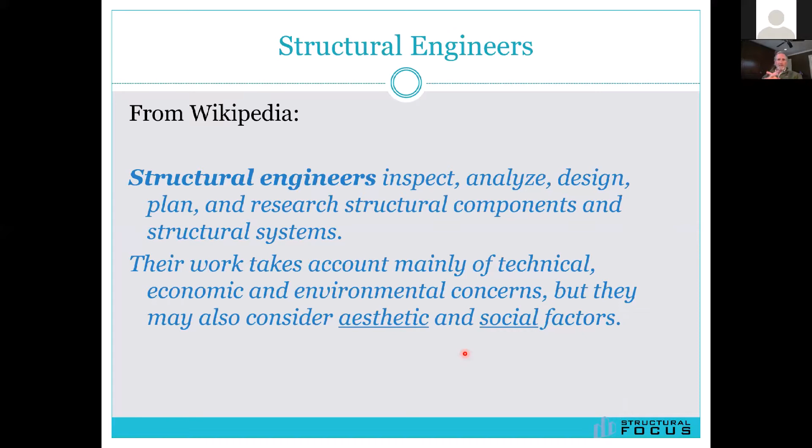Structural engineers, I always like to throw this slide in there because I appreciate that Wikipedia has this second sentence. The first one is what you'd expect: we inspect, analyze, design, plan, and research structural components and structural systems. The second one, though, is interesting - it says we take into account mainly technical, economic, and environmental concerns, but also consider aesthetic and social factors. I think that's really great that that's listed in our description.

Structural Focus, our mission is we exist to do projects that we can be proud of and proud of how we do them. My point is that structural engineering is more than just analyzing and designing a building's connections. There's also other considerations: sustainability, public safety, aesthetics, community resilience, preservation of historic structures, and obviously the client's needs. We're working for clients and have to pay attention to what their needs are. We need to understand not only them, but the impact we have on the natural and built environment.

So five things we do at Structural Focus that we like to emphasize: we like to think like our clients, putting ourselves in their shoes to understand their needs. We explain and use performance objectives whenever possible. We try to reuse buildings - we're not inclined when people call us and say, I need you to look at this building and tell me that I can tear it down. We'd rather save a building than tear it down. We try to communicate clearly, and we like to design elegantly and authentically, as I put it. A lot of that will come out as we talk.

Learning from earthquakes. I grew up in Richmond, and didn't really know what an earthquake was. I moved to California and found out I knew nothing about the main driver of structural engineering there - earthquakes. Luckily, I went to work for Degenkolb, and Henry Degenkolb was kind of the original earthquake chaser. He felt that the real-life scenes after an earthquake were the best classroom for structural engineers to figure out how to design and retrofit for earthquakes.

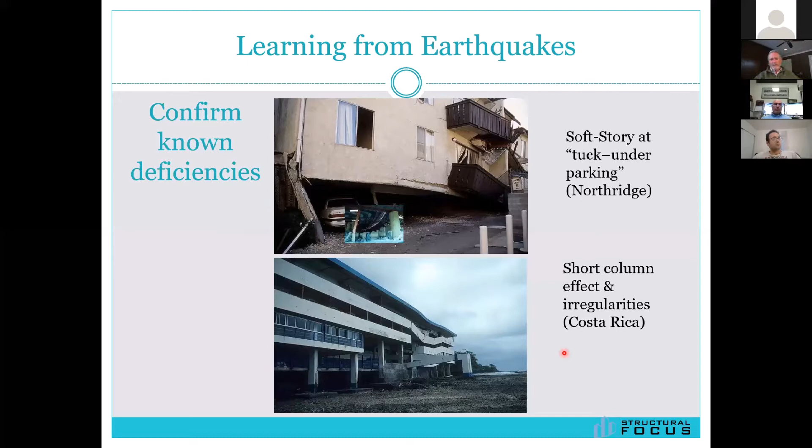So we went out lots of times looking at earthquake damage. Sometimes we're looking for known deficiencies, confirming issues like the soft stories and tuck-under parking in Northridge. This is a resort hotel in Costa Rica that I went to back in '91 or '92, where the short column effect took it down - it basically collapsed the building.

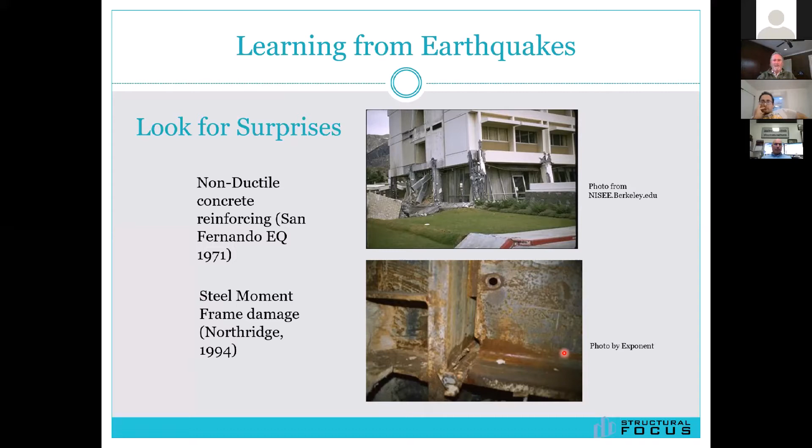We also have surprises that we did not expect in the structural engineering world. There was a brand new hospital in San Fernando that was hit by the 1971 earthquake, and it was destroyed because of the non-ductile detailing in the columns. Then, even going into the Northridge earthquake, we thought steel moment frame systems were the best there is, far superior to any other system out there. When we first started hearing reports of damage, we couldn't believe it. Turns out it was a very significant problem.

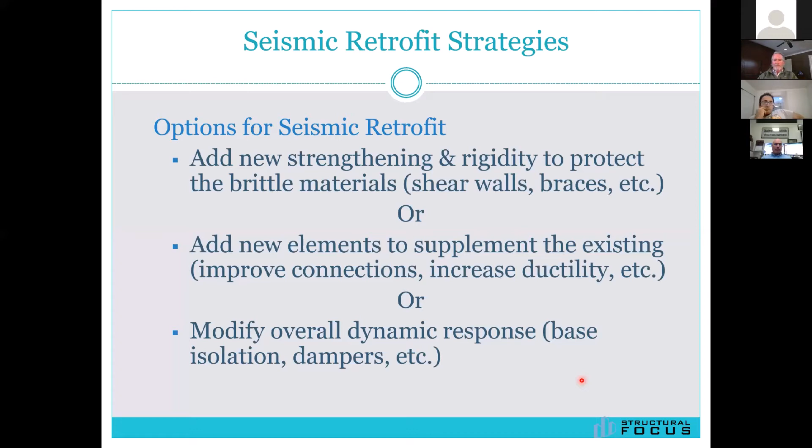So that's where, if it's a very brittle, historic landmark building, that sometimes is the best solution. There have been several city halls - San Francisco City Hall, Oakland City Hall, Los Angeles City Hall, Pasadena City Hall - that have been base isolated because they felt that was the most economical and the best protection for that particular building, but it is expensive to do.

So a little bit more about strategy. If you're an owner and you have a historic landmark building and you want that building, what you have to find out is whether that building is a good investment. You might like the historic architecture, but it needs to be marketable. You need to be able to make money on that building. So they'll ask all the experts, they'll ask the realtor, can we actually, does this building have value? Is it marketable? They'll ask the architect, can this building be usable?

You know, is it functional? Is it got the right space? Has it got enough light, all the things that a tenant or a user might want? They ask the mechanical, electrical, and plumbing consultant, can it be efficient, with all the energy costs and everything nowadays? So they want to know whether they actually can make this have efficient systems.

But in California, what's interesting is many times they'll come to us and ask, can it be safe? And they have an end goal, and we often are the deal breaker, because the seismic retrofit cost is often the most expensive part of the project. Nobody wants to mess around with life safety. It's always, if you talk about it being unsafe, then everybody runs away. So it's an interesting place for us.

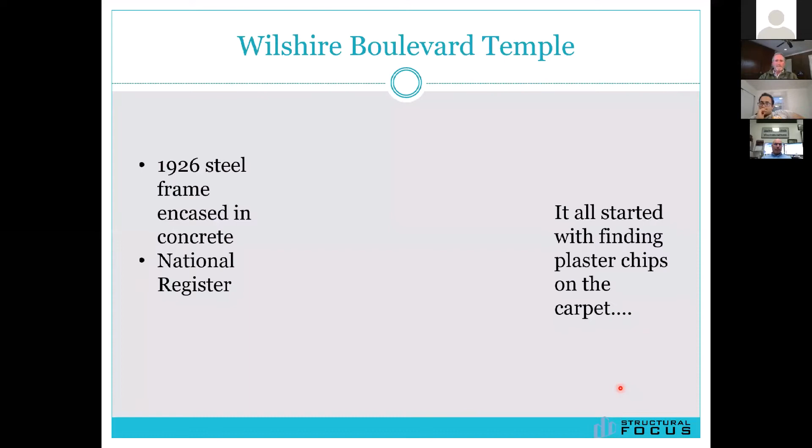So here's some case studies. The first one is the Wilshire Boulevard Temple. It's a 1926 steel frame encased in concrete, and it's on the National Register.

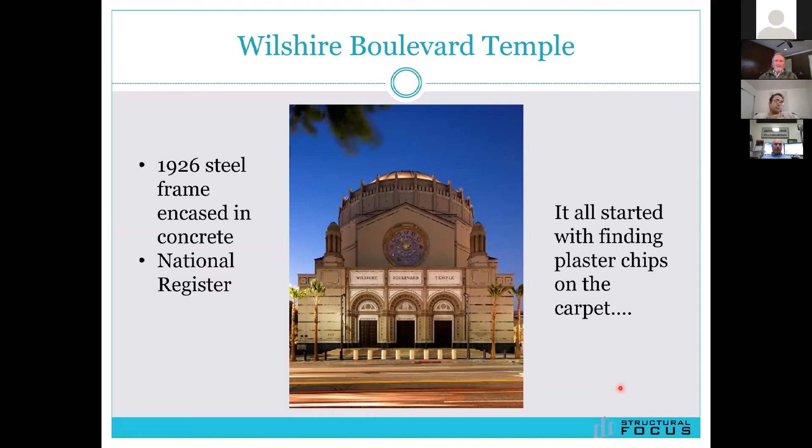We got a call one day that the housekeeping people kept finding plaster chips on the carpet in the sanctuary, and they didn't know where they were coming from. So we got some scaffolding out and started doing some inspections, and we found that the inner side of the dome, which is plaster, was beginning to chip away around the perimeter. Our theory was that the whole thing was shifting within the concrete dome—there's a concrete dome and then there's a plaster dome—and it was moving around, and where it was hitting around the edges, it had already been weakened somewhat by temperature variations over the years. It was doing a little bit of pounding against the concrete.

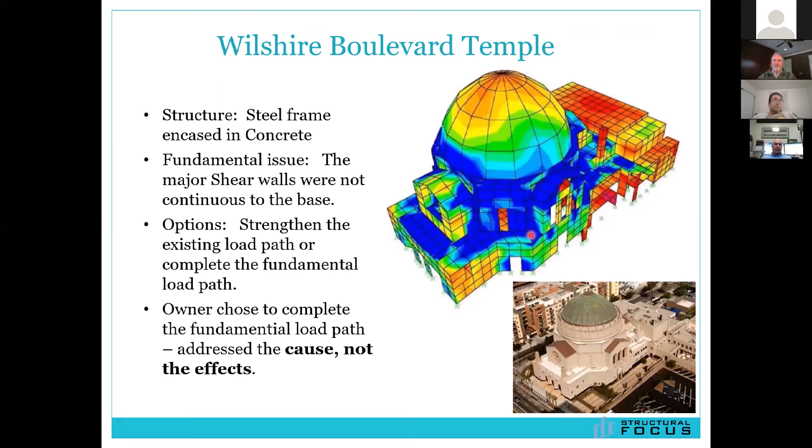It turns out that those octagonal walls in the sanctuary are basically hollow walls. They're plaster on both sides, and there was a big void behind the plaster. Unfortunately, the plaster was a very historic fabric, and it scared them to do that, but they realized that was a better scheme. So I like to say that we addressed the cause, not just the effects, in this particular building. To do the work, they had to make a choice.

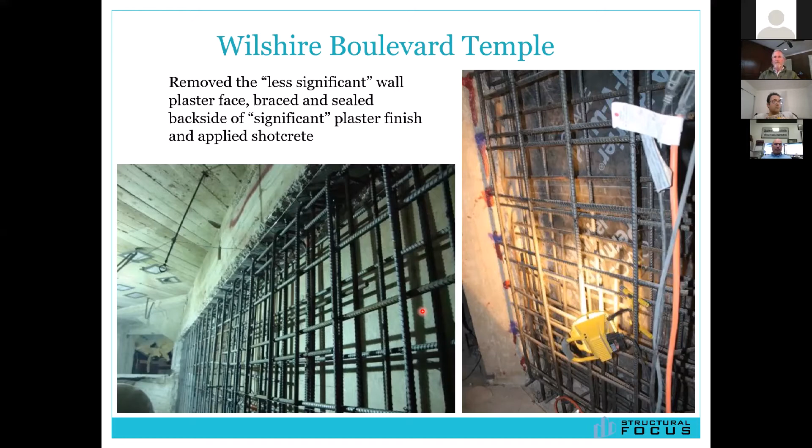They had to choose—you've got two faces of the wall. There's the plaster side on the hallway, basically the corridor outside of the sanctuary, and then there's the plaster on the inside, which had a mural on it and some other stuff. So we finally agreed to pull the plaster off of the less significant side and go in and build some studs against the plaster on the inside, then put some waterproofing on that surface, then put the rebar in, and then shoot shotcrete against that waterproofing to embed the rebar. That's how we created concrete shear walls.

And it made a big difference—it was a lot simpler project at that point. They did work all around the perimeter, just repairing the concrete. They also built a complete forest of scaffolding in the sanctuary to get up to the ceiling, to restore the ceiling.

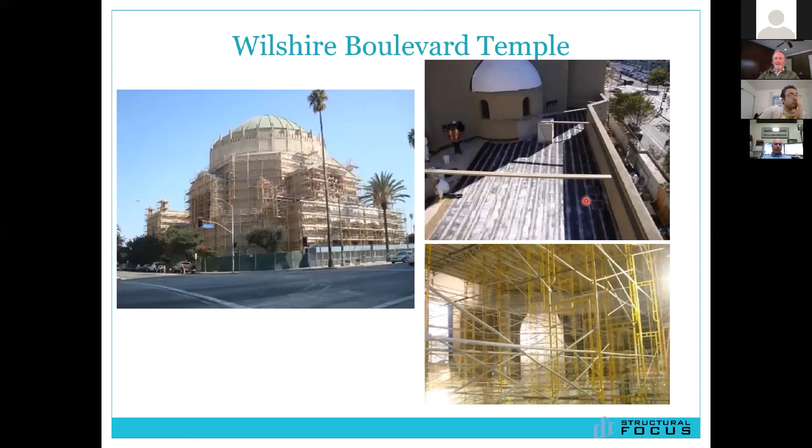Basically you go to the substrate, clean it all off, you paint some epoxy on there, and then lay out the FRP mesh. That provides a lot of shear strength. It doesn't change the stiffness, but it increases the shear strength, and we were able to use that on the roof diaphragm.

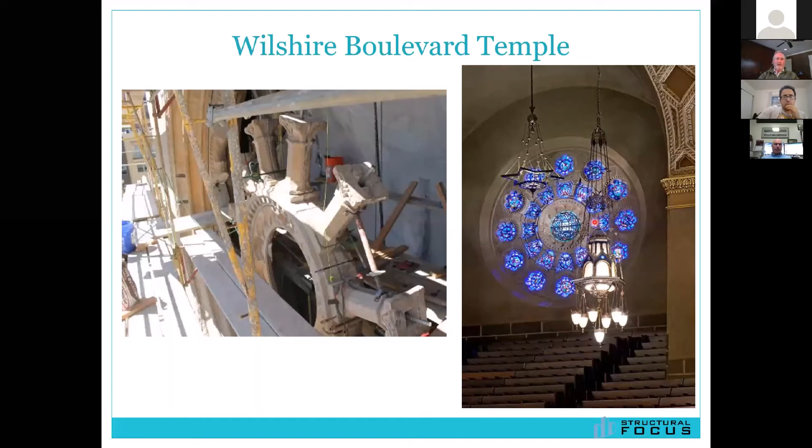We rebuilt the rose window. That was an unreinforced heavy stone, about 20 feet in diameter, right over the main lobby. We were nervous that if there was an earthquake, it was so heavy it would fall into the narthex and come crashing through the roof. So we cut it apart, inserted rebar in it, and put it back together. It's all the original parts, but now it's got rebar in it, so it's heavily reinforced.

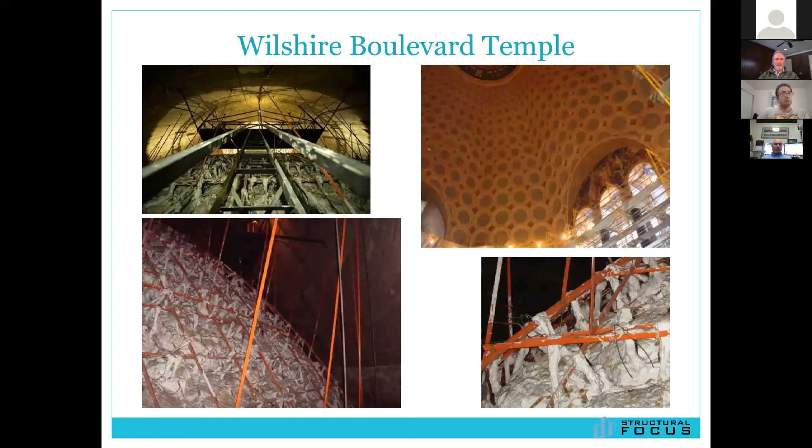So that's the final product on the interior. It's a beautiful space - the largest dome in LA. It's really something, and that whole church has now come back to life and reinvigorated the neighborhood. It's really an amazing project.

Next one is the Proper Hotel. This was an old medical professional building in Santa Monica, about 7 blocks from the beach. It's a designated historical building, built in 1926, with very thin concrete walls - 6 to 8 inches thick around the perimeter. It's 8 stories tall, irregular in plan with some vertical offsets at the second floor line. I'll show you that in a minute.

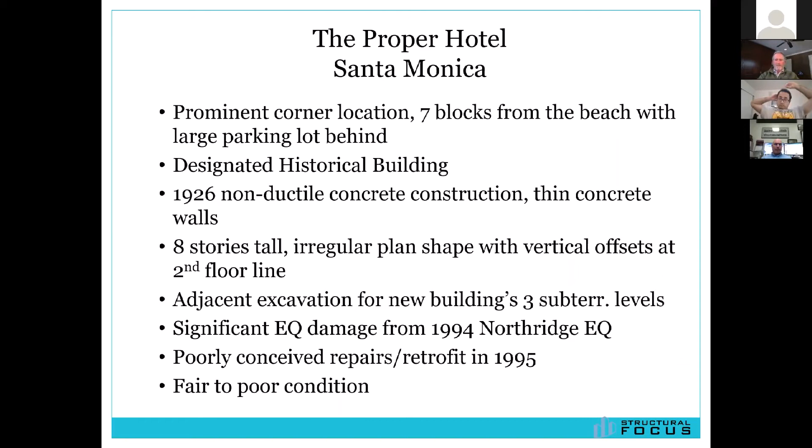It's part of a larger project to build a brand new hotel, a very large hotel with 3 subterranean levels immediately adjacent to the structure. This will become, or has become, part of that new hotel complex. There was significant damage during the Northridge earthquake in '94, and the repairs and retrofit were very poorly done - the building actually was not in very good shape at all.

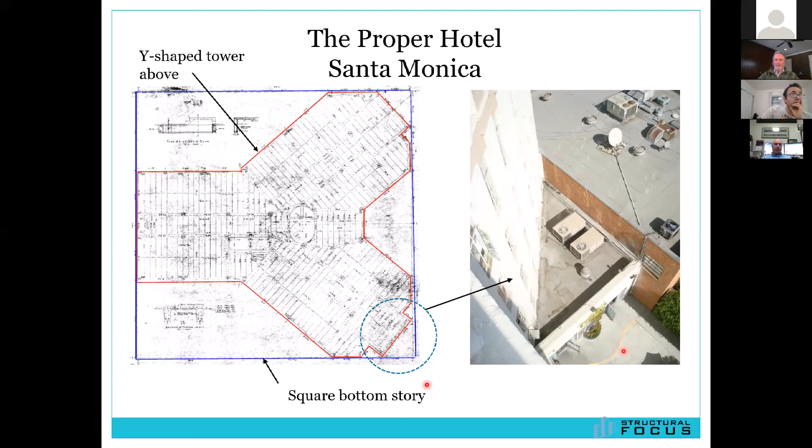This is a plan view showing the Y shape of the upper stories, and then the first story was basically a square, so you can see this offset at the corner. That caused a lot of problems when we did the analysis - that irregularity caused a lot of stress concentrations.

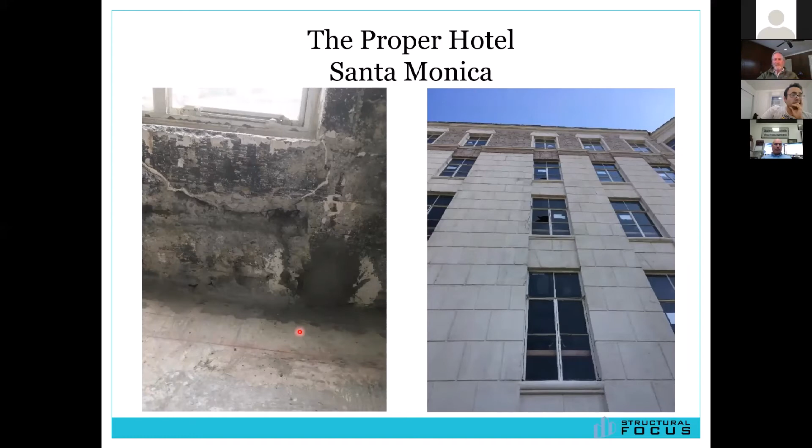There's a lot of cracking and damage to this concrete wall here, and when you get up into here, there's a whole lot of damage. This is the interior after the plaster has been taken away. This is a window with significant cracks and spalling in that concrete wall - it was really in poor shape. It actually was kind of scary once we uncovered all the cracks and saw how bad the building was. It was much worse than we thought.

One thing I wanted to point out about this project: a lot of times we have to do what's called a mitigation plan when we go in to do a retrofit, and this is just the beginning of it. It's part of the planning approval from the city - they require that. In this case, they required us to do a complete video of all the surfaces in the building before any construction started, so they knew what cracks were there in case of any claims of damage due to the adjacent construction and vibrations. They also had vibration monitoring.

If the vibrations got stronger than the limit, they had to stop work immediately and figure out what they were doing wrong. We were required to inspect the building every month during construction. But all of this is to make sure that the building survived the construction next door.

We've done a lot of this kind of work where historic buildings or very nice buildings are immediately adjacent to construction. The best thing you can do is go out there and get the original condition so you have a baseline, because humans always think cracks are getting bigger, and they aren't necessarily getting bigger. So you need to know exactly what you're starting with, and then when you go back and check it later, you've got something to work with.

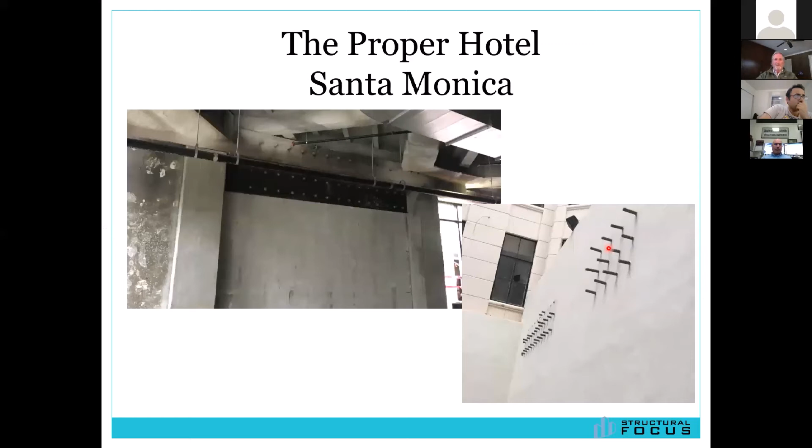This is some more use of FRP that I talked about at Wilshire Boulevard Temple. This is a much more conventional use where we wrap a column, and by doing this, we provide the confinement that we would need now for code, but back then they might use number 2 wires at 5 inches on center, or number 3s at 8 inches on center. There's no way that's going to be strong enough to confine the concrete core. So by adding this FRP around it, that does a very, very good job of confining those cores and adding a lot of ductility to the columns.

In this case, this is used—that's FRP along there, and there's FRP along there. And both of those are used not only for vertical floor strengthening, but also for collectors, for dragging loads from one area of the diaphragm over to a shear wall. So we've used FRP quite a bit. It's expensive, but architecturally it works really well because it doesn't really add much thickness to the section.

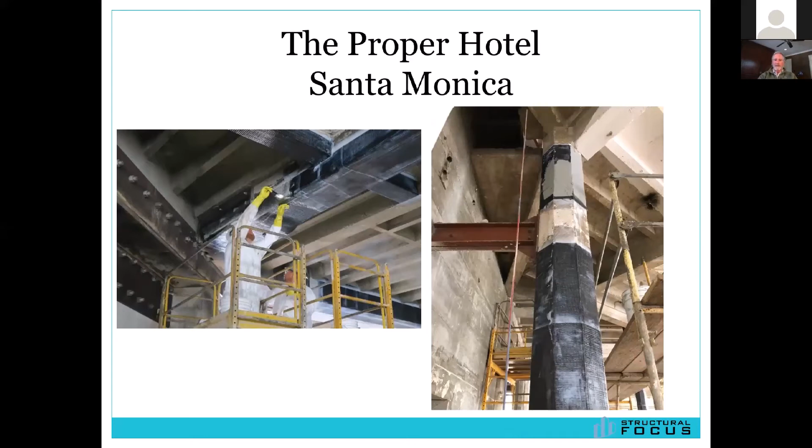You can imagine one option for this column, for example, would be to wrap it with new rebar and then cast an extra couple of inches of concrete all the way around it. So that column would grow by at least 4 inches, and that doesn't always work architecturally. So FRP is a good solution to that.

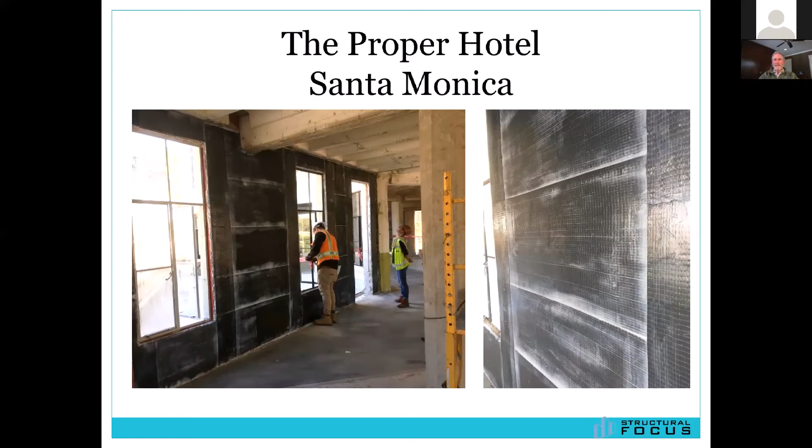In addition to that, we've used it on the concrete shear walls in this particular building. These were very thin concrete walls. They patched all the cracks first, prepared the surface, and then put FRP on the surface of the walls. They'll go back now and just put sheetrock over this, so it won't increase any thickness to the wall, but it will increase the strength, and some of the ductility. It does not increase the rigidity of the walls per se, any measurable amount anyway.

So there's the almost done. You see the construction fences up. That's the new hotel, which is very different from the historic building, but you can see this has all been cleaned up and it's actually back to a landmark again.

The next project is 9300 Wilshire. How am I doing time-wise? I think I'm okay.

This is, believe it or not, an historic designated building in Beverly Hills, 1962. So now they're considering buildings in the 60s, and they're even getting into the 70s now as historic. This is all concrete construction, but in 1962, obviously it does not have the ductile detailing that we would like to see in it.

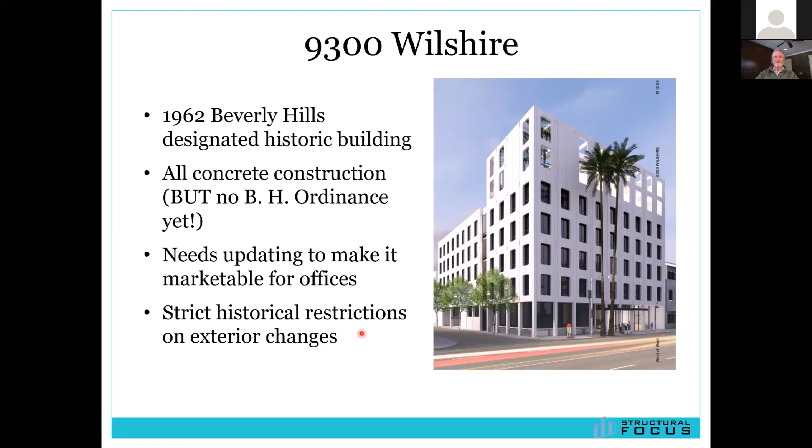It needed to be updated to make it marketable for offices. It was getting really tired. And there were some very strict historical restrictions on the exterior changes that we could make, mostly related to these columns along the street. They did not want to change any of the appearance of that.

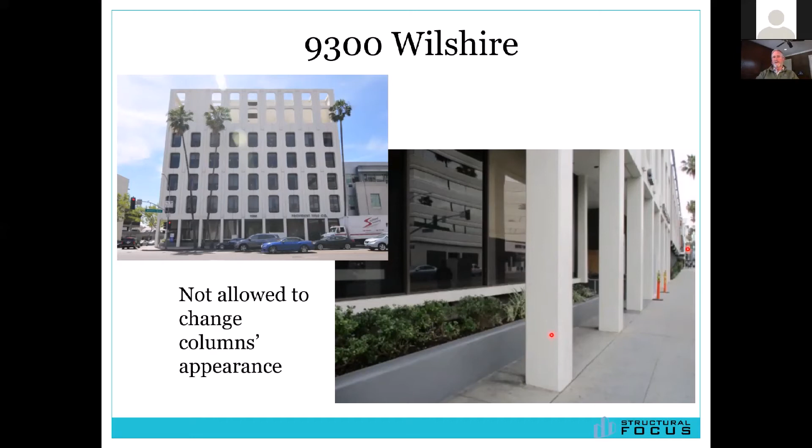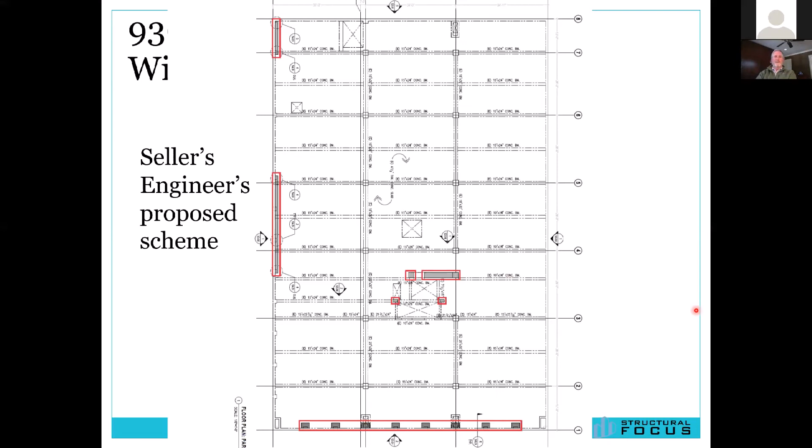Unfortunately, they based a budget on that scheme. When they sold the building to our client, we looked at that and knew they were not going to be allowed to change those columns on the street side. So we tried to come up with a scheme that would not change those columns.

Our first thoughts were, again, we'd do the shear walls here. We needed a shear wall here. We found out that he had missed something. We were going to wrap these columns back here with FRP.

Then we proposed a shear wall right here next to the elevator core. By doing that, we felt like we'd added enough stiffness near the front of the building to relieve the torsional problems we were having. That way we could get away with just doing a very careful wrapping of these columns out front, because we had greatly reduced the drift in the building, and therefore weren't causing the problems with those columns that it was having before.

We finally settled on a scheme, because that shear wall I had proposed back here was very expensive, since you'd have had to work in the elevator shafts. We looked at putting it here, we looked at putting it there, we looked at putting it there. And then we proposed, well, why don't we do a massive

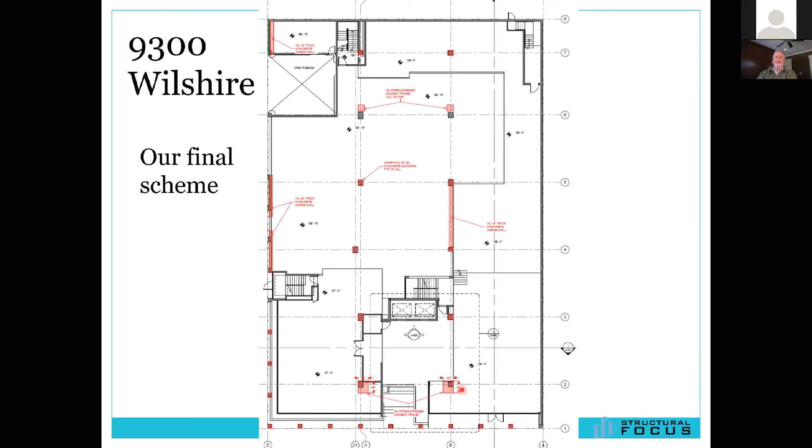2-column, 2-story tall moment frame right here. And this is the lobby. So by doing that, we're putting this 4-foot square concrete column right down through the middle of their lobby, but we're saving a lot of money, and they liked that idea. So that's what we ended up doing, taking that shear wall that was going to be here and turning it into a very large moment frame, 2-column moment frame.

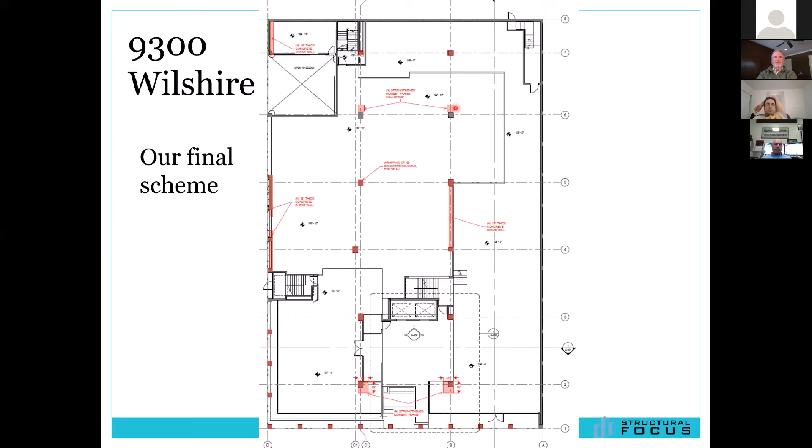We're still going to wrap the columns on the front, and for the rest of the scheme, we ended up putting a moment frame back here also instead of a wall. That ended up being the final scheme. We had done an analysis and played around with lots of different ideas. So that's what we ended up with.

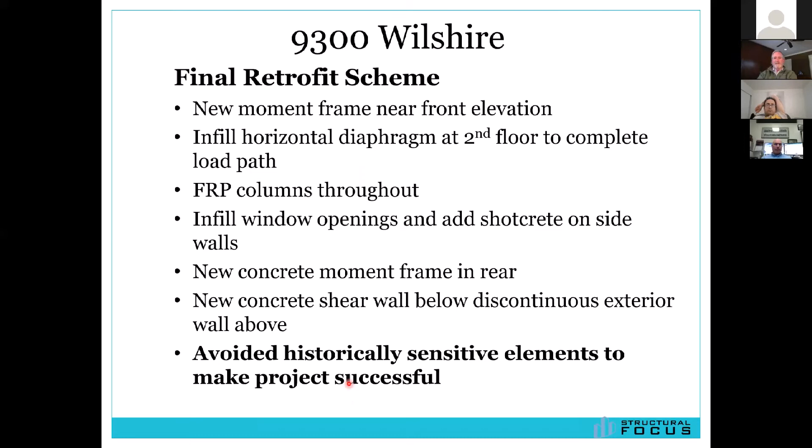Basically, all the columns still needed to get wrapped with FRP, which is disruptive, but in the end it's a better architectural solution. We ended up infilling some window openings, put the new moment frame in, and put a concrete frame below a discontinuous shear wall in the back, which the other engineer had missed. We were able to avoid changing those historically sensitive elements, which made the project doable.

My final case study, once again, is a concrete building. It's called the Masonic Temple, in Glendale. It was built, I believe, in the 19-teens, though I forgot to write the date down. It's a very prominent location in the city of Glendale. There's a big commercial development across the street from it, but it's been sitting empty for decades. It's an 8-story tall building, a landmark building, and hardly had any original construction documents, which obviously makes it difficult.

The owner developer of the development across the street has a lot of political power, and he actually went to his fraternity brother, who is the head guy at CBRE, and convinced him that it would be a great office for CBRE. So that's how they put the deal together. It's a very demanding client with a ridiculous schedule. We started design on May 1st, and they moved in on January 1st.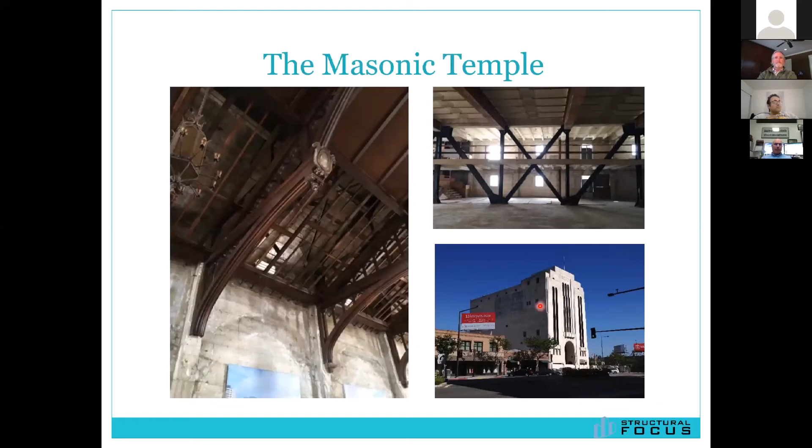So we performed a detailed seismic analysis. The biggest problem in this building was torsion, that it really wanted to twist. There were some discontinuous walls. It was very soft in the back.

We ended up closing some windows and adding some new windows. By playing that game, we were able to make the system a lot more symmetrical and minimize the torsion. It was an interesting game with the owner and the architect. At first they thought we were crazy because we were suggesting putting in more windows, but they liked it and didn't argue with us. We eventually got it so we could get a very symmetrical response out of it.

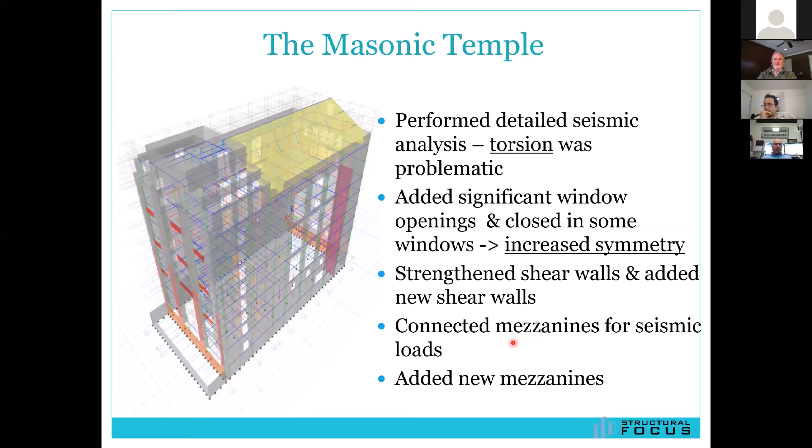We ended up strengthening some shear walls. We added a few new shear walls, especially under some discontinuous ones. We had to connect the mezzanines. Most of the mezzanines weren't really connected to the structure for lateral loads, so there was no place for those loads to go. And then we added a few mezzanines also.

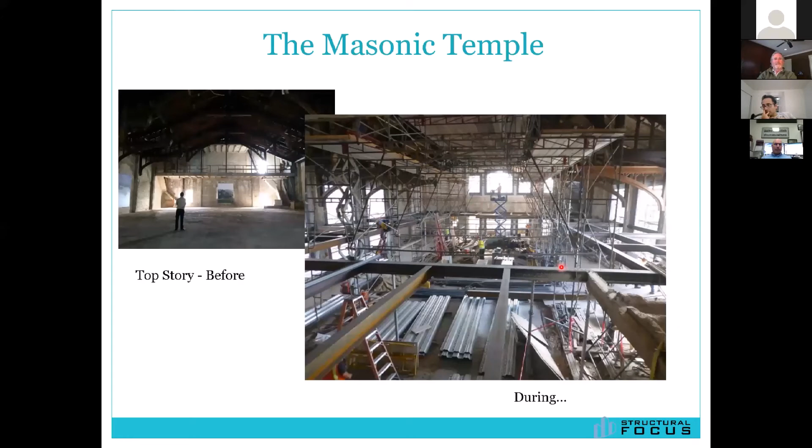So those are my case studies. Anybody have any questions before I go? I just got a few more slides.

I just want to ask something about these retrofitting projects you showed. I saw a combination of using FRPs and shear walls and different techniques for resolving these discontinuities in the buildings. I'm curious, I think there are multiple schemes to retrofit proposed in the initial sessions, and then you finally choose one of them, right?

Yeah, and I think there were different drivers. In your experience, what is the most significant driver to choose any of these schemes for a specific project on average? Well, money is always, if not the top consideration, one of the top considerations, obviously.

Schedule is obviously one, but then the other ones are, what's it doing to the building? Is it still going to be a usable building? And if it's a designated historic building, you have those restrictions too. So you can't even, at 9300 Wilshire, we couldn't touch those columns. We couldn't change those columns.